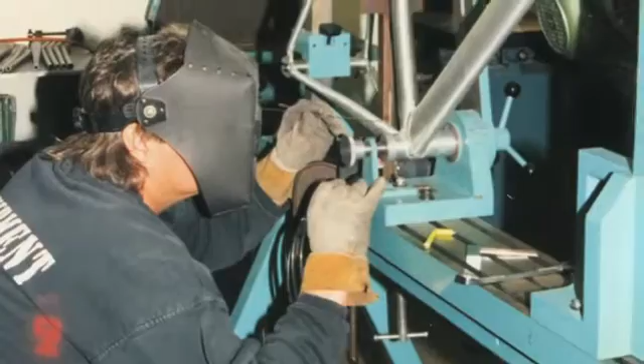They had sponsored an athlete called Paula Newby-Fraser, and they did the sponsorship deal but didn't have anyone in the company that knew how to build a bike, and that was me. So at the time they asked me if I would build that bike on my own time, and so at night I went home and built her bike, and surprisingly enough she went out and won the Hawaii Ironman and won the world championship the first time she rode it. So it kind of went from 0 to 100 overnight.

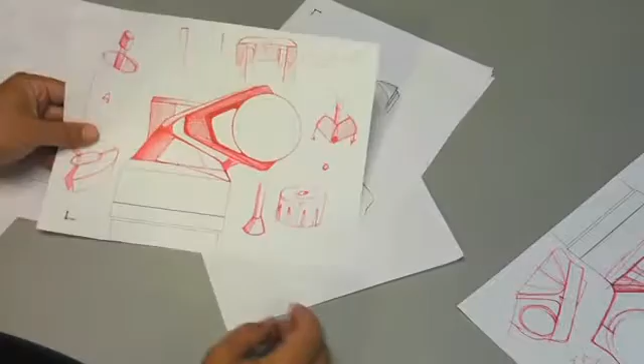We're a lot different than most other manufacturers of bicycles. We start with a clean canvas, start from scratch, and design every single part and component that goes into that project. I think that sets us apart. Of course, it's a longer process, but I think at the end of the day, you get a better bicycle by doing that.

I feel like I'm the lucky one because I have such a talented group of engineers working with me to develop our bicycles, and from the initial concept all the way through the finished product, I've got such support. And from doing it originally by myself till today, having the team that I have working with us at Felt is a huge home run for us. My philosophy is to deliver the right tool for the right job, and no matter what segment of cycling we contribute to, we're going to build the best bikes in the world.

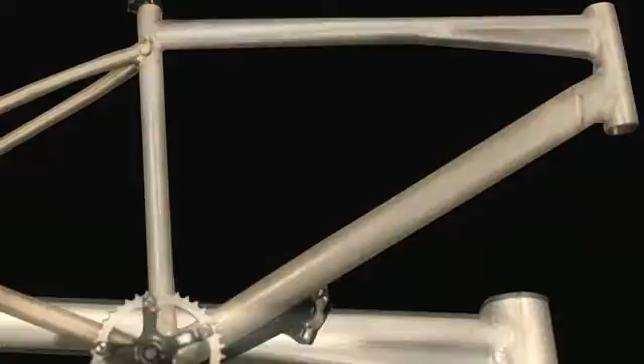When we start the design process at Felt Bicycles, it really depends on what type of product we're working on. It might go from simple things like stems and components where we're using sketching, and then from there we go into solid modeling software. Different composite projects use different testing techniques. We might make prototypes out of aluminum for geometry before we go ahead and actually start the final composite design so that we know how the bike's going to ride.

At Felt, we actually have a really wide range of tools that we use in the development process. In Pro Engineer, we can actually model either a stem, a component, or a frame three-dimensionally, so that we can actually see how it's going to look, how it's going to fit, and how it's going to function with the different parts of the bicycle.

If it's an aerodynamic type product, we'll go ahead and take that 3D model from Pro Engineer and bring it into software called Star CCM Plus, which is a CFD software that allows us to look at the airflow of the bike and measure drag virtually in the computer before we actually even go ahead and make a sample.

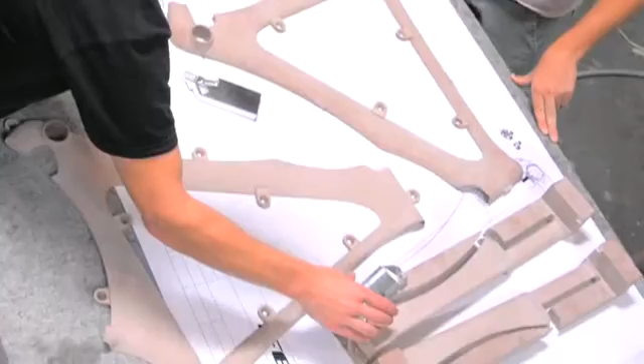We will take models, prototypes, frames made out of clay or modeling board, and bring those to the wind tunnel and actually test them first, make tweaks to them with clay, different ideas, and really use the wind tunnel as a development tool. From there, we'll then finalize the design, finish it in the computer before we even cut a tool or make a single part.

Working with the riders, we just don't give them product for them to test. We actually listen to them. We take their feedback and actually use that feedback to come up with new ideas for product. So really, the team at Felt is a really big part of making product come together, from a concept through development to the final product to get it exactly what we're trying to achieve. Our teams and athletes influence our design in everything we do at Felt.

I was a frame builder doing it all on my own, and then I had met a couple of guys, Bill Duehring and Michael Müllmann, who basically helped bring this brand to the level that it is today. I believe that companies are built with people, not marketing hype or slogans. I believe that when you have a group of people that live and breathe bicycles, that love what they're doing, that's the base to build a great bicycle company from.

Every bicycle that we bring out is 100% designed by Felt in California. We design every tube. We never use off-the-shelf tubing. Our carbon frames are completely designed in-house by this company. At Felt, our base is engineering and product development. The fact that both Jim Felt and I have come from a technical background, I do think it helps the overall emphasis in our company for frame designs.

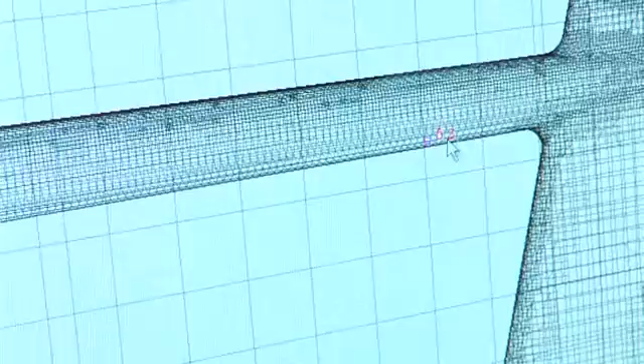Our engineers understand that we give them a lot of rope. We're not afraid to go after new designs. We're not afraid to stretch the limits, and it's because we've seen over the years what great designs can do. I've been in the bike business since I was 12 years old. I've worked for dealers, I've managed shops, but to see your bikes being raced in the Tour de France was just fantastic. Felt's mission is to design, develop and deliver the best bikes in the world.